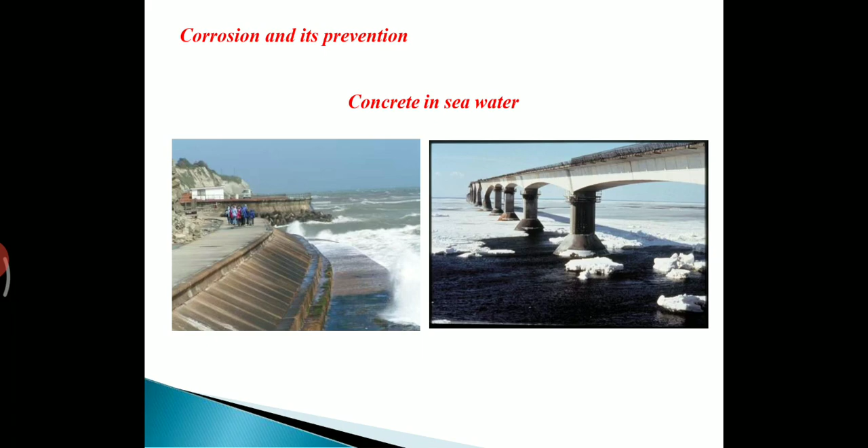So first let us see what is corrosion of steel. ASTM defines corrosion as the chemical or electrochemical reaction between a material, usually a metal, and its environment that produces deterioration of the material and its properties. For steel embedded in concrete, corrosion results in the formation of rust, which has 2 to 4 times the volume of the original steel and none of the good mechanical properties. Corrosion also produces pits or holes in the surfaces of reinforcing steel, reducing strength capacity as a result of the reduced cross-sectional area of the steel section.

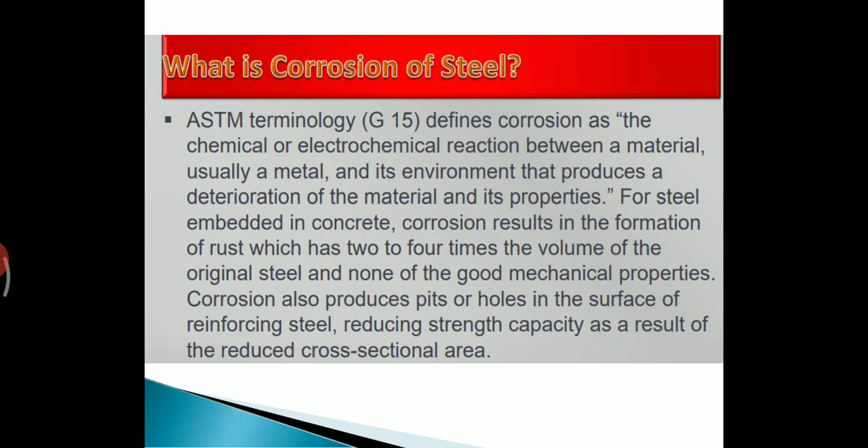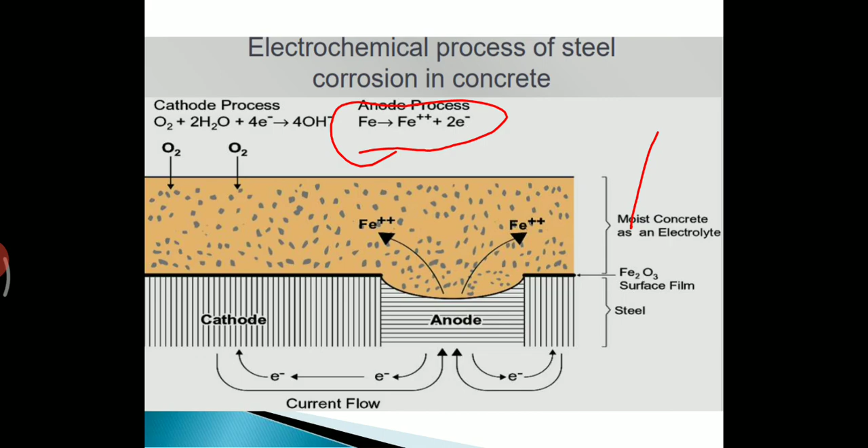The natural state of any metal is in its oxidized state. Metal can be found in nature in the form of oxides, carbonates, sulfates. For the practical use of a metal, a certain energy is invested in its reduction from the natural mineral state. The process by which a metal returns to its mineral state is generally termed corrosion. Corrosion is therefore the process by which the metal passes from its metallic state at zero valence to its oxidized state, liberating electrons.

For iron, this can simply be written as the equation: Fe becomes ionized in terms of Fe plus plus plus 2E minus, which liberates the electrons. The electrons are then transferred to another substance in order to become a neutral substance. The mechanisms for transfer of electrons from the metal to another substance can basically occur in two manners: one is directly, or another is through an aqueous solution.

The direct transfer occurs only at high temperature, where water cannot exist in liquid form for transferring the electrons. But aqueous corrosion is the most common mechanism and develops at normal temperature. In aqueous corrosion, the transfer of electrons happens through the liquid medium. In concrete, this method of aqueous corrosion generally happens.

Corrosion in the presence of liquid water occurs by an electrochemical mechanism, so chemical reactions and the redox process occur simultaneously. Thus metallic zones with different electrical potential, due to the metal being in contact with the electrolyte, drive the force of chemical reactions involving the exchange of electrons.

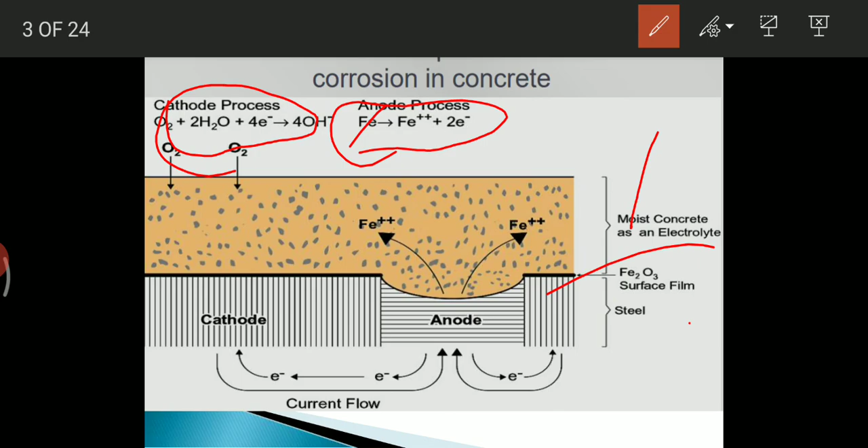So then the next slide, corrosion in seawater. Normally the structure is majorly affected by corrosion which happens due to seawater. Normally seawater is subjected to chloride, yes, it contains a lot of chlorides. Then what happens? The chloride enters into concrete, which forms the corrosion of steel.

Then salt weathering - salt weathering is also done in the concrete from the seashore. Then abrasion by sand - the sand is giving the frictional force when it is hitting the structure, and therefore abrasion by sand happens.

Then seawater contains some amount of CO2. So when CO2 enters into the concrete, then carbonation takes place, and that leads to the corrosion of steel. Then calcium hydroxide and calcium sulfate are soluble in seawater. Then the rate of chemical attack is increased with temperature.

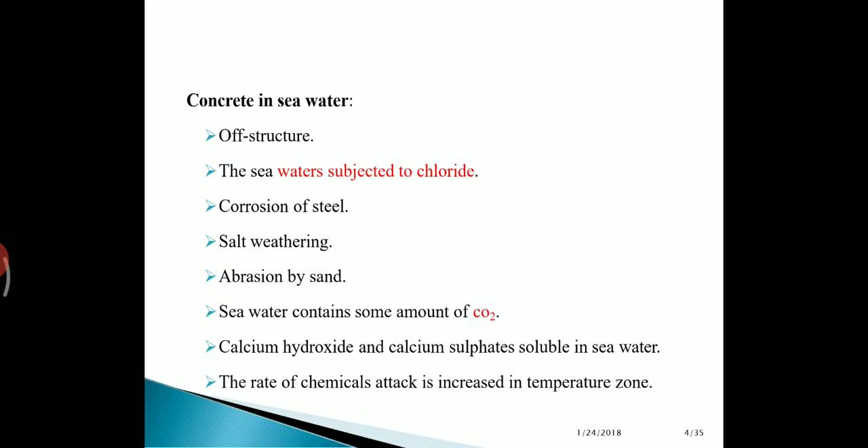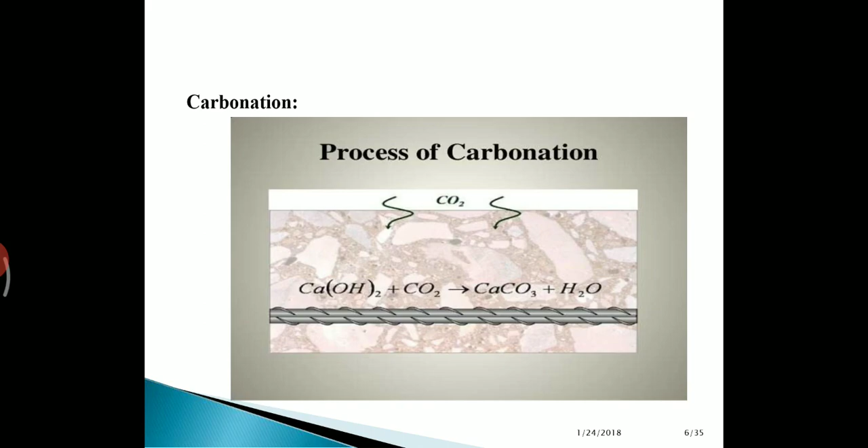Then next let us see the carbonation. So what is carbonation? This is a figure which shows what is affected by carbonation. So the process of carbonation is taken like this. Carbonation of concrete is a process by which carbon dioxide from the air penetrates into concrete and reacts with the calcium hydroxide to form calcium carbonate.

So carbonic acid attacks the concrete. The carbonation of concrete is one of the main reasons for corrosion of reinforcement.

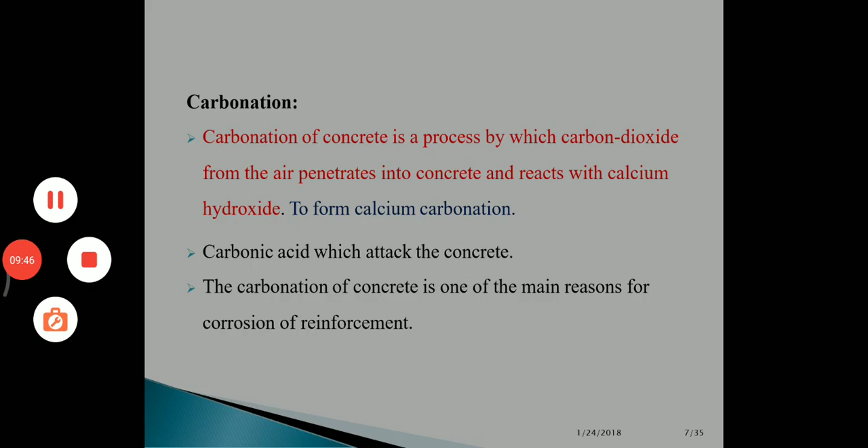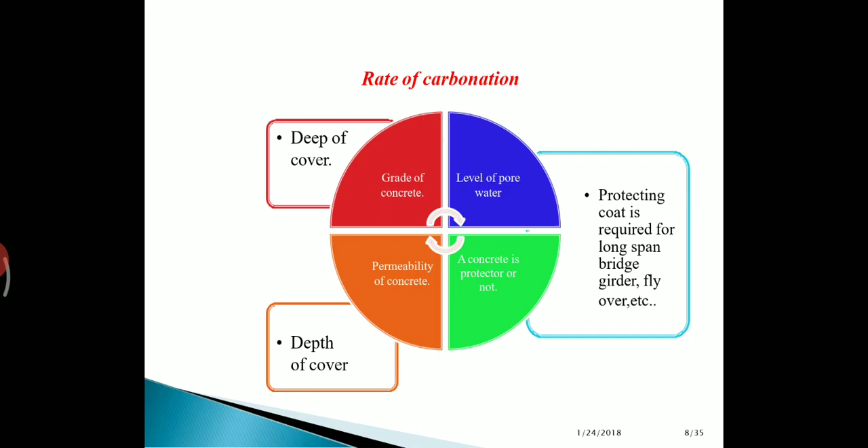Then what are the factors to increase the rate of carbonation? The first one is grade of concrete, then level of pore water, then permeability of concrete, then whether the concrete is protected or not. So these are all the factors which increase the rate of carbonation.

Then what are the effects of corrosion? The ultimate strength of the concrete is reduced, so the strength of the structure is also reduced. Then the structure will fail. Then eccentricity happens - suppose if the joint portion fails due to corrosion, eccentricity happens.

Then cracks and spalling of concrete also happen. The cross section of reinforcement progressively reduces, and therefore the tensile strength carrying capacity of the steel and concrete gets reduced. Then the cover of the concrete is adversely affected.

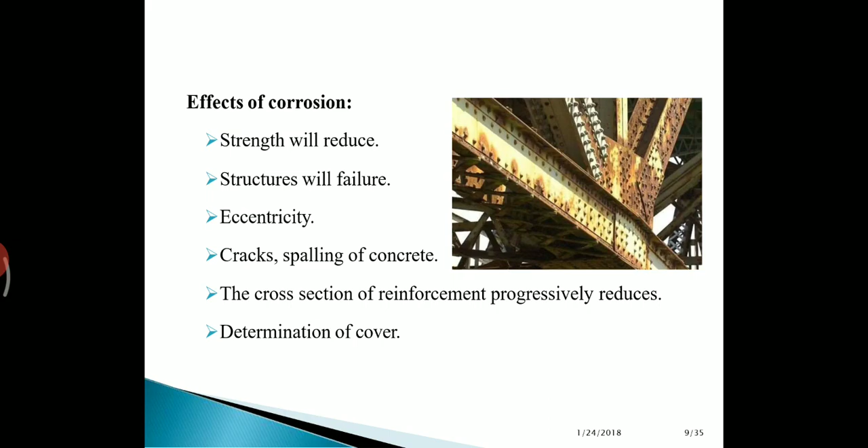Then how do we control this corrosion of steel reinforcement? Let us see. The control of corrosion of steel reinforcement is done by the metallurgical method, then we use corrosion inhibitors, coating to reinforcement, de-rusting or phosphating coating to concrete, cement coating, sealing, fusion bond, epoxy coating, galvanized reinforcement, and finally cathodic protection.

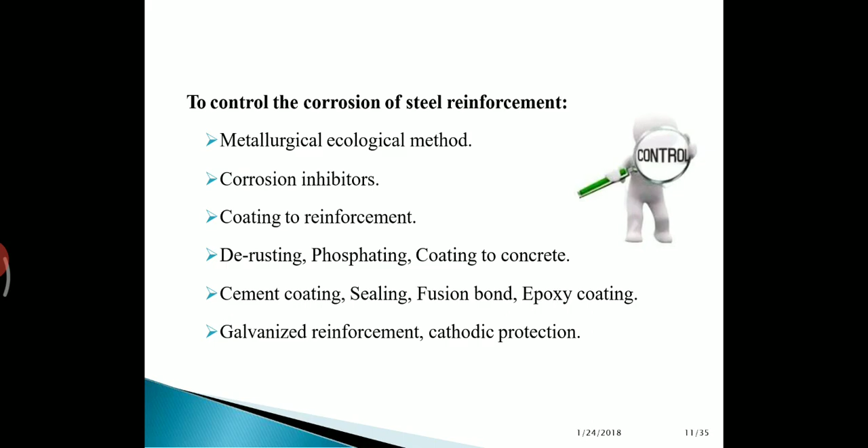So what is the metallurgical method? Steel can be made more corrosion resistant by altering its structure through metallurgical process. So basically, once the manufacture of steel itself is made having resistance against corrosion, that is the metallurgical method.

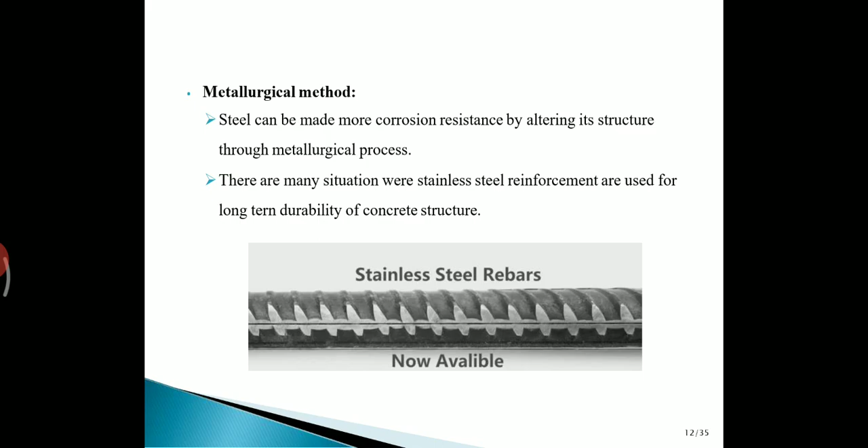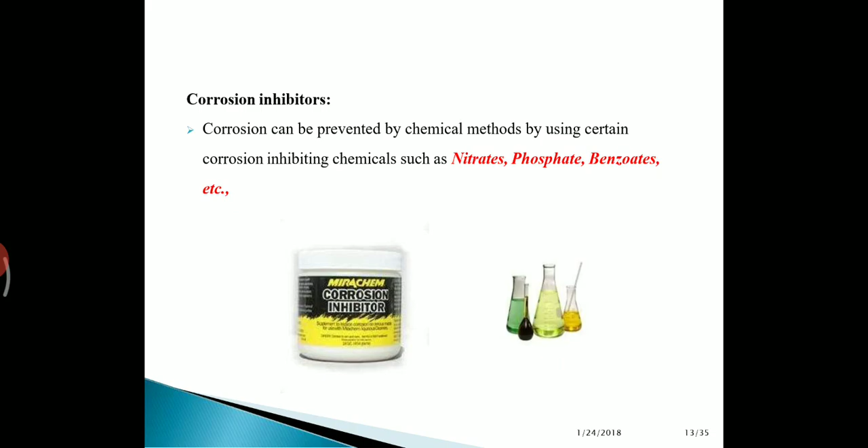So there are many situations where stainless steel reinforcement is used for long-term durability of concrete structures. Then corrosion inhibitors - corrosion can be prevented by chemical methods using certain corrosion inhibiting chemicals such as nitrates, phosphates, then benzoates.

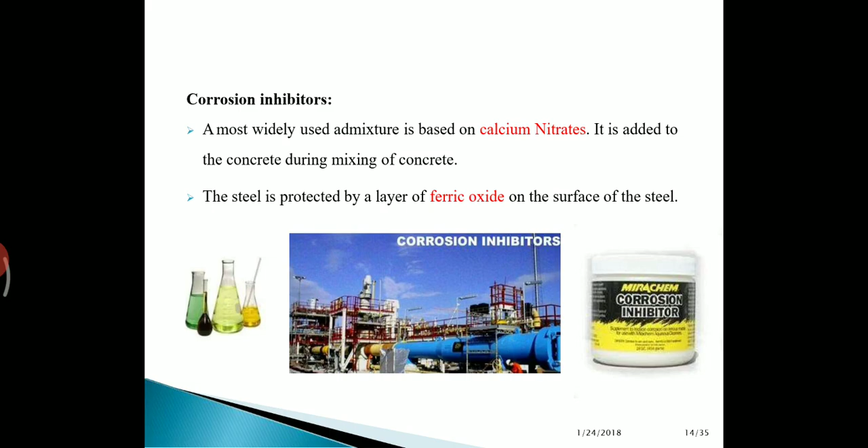A most widely used admixture is based on calcium nitrates. It is added to the concrete during mixing, and therefore the steel is protected by a layer of ferric oxide on the surface of the steel.

Then coating of reinforcement - the object of coating steel bars is to provide a durable barrier to aggressive materials such as chlorides. So the coating should be robust to withstand fabrication of reinforcement cage and pouring of concrete, and compaction by vibration needle.

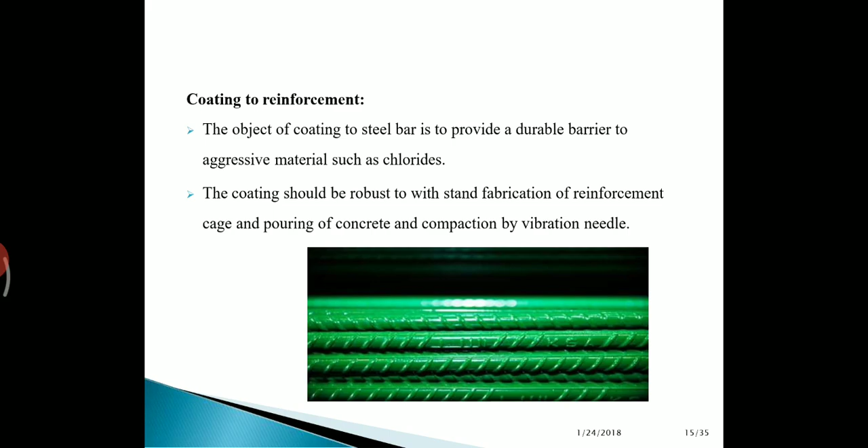De-rusting: the reinforcement is cleaned with a de-rusting solution. Once rods get corroded when placed in exposed conditions, before placing the reinforcement, if it has any formation of rust, it should be cleaned with a de-rusting solution. This is followed without delay by cleaning the rods with wet waste cloths and cleaning powder. The rods are then rinsed in running water and air dried. Then phosphate is applied to the surface, and an inhibitor solution is brushed over the phosphate surface.

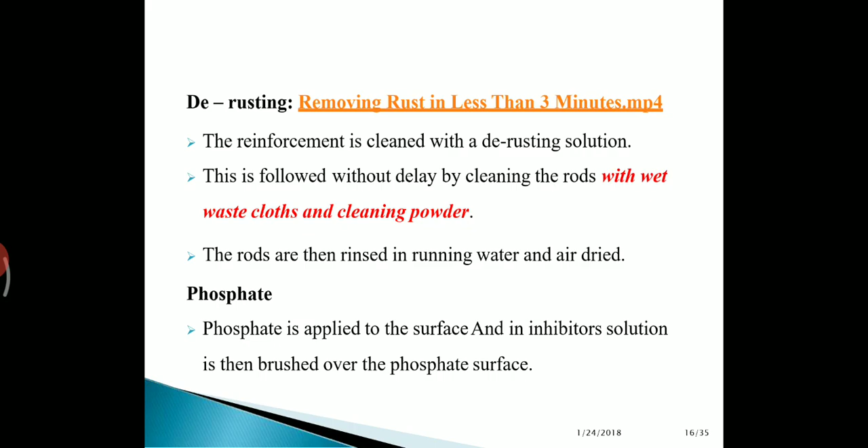Now let us give the cement coating. Slurry is made by mixing the inhibitor solution with water and cement and applied on the bar. The sealing solution is brushed after the rods are air cured, and this sealing solution has an inside curing effect. The second coat of slurry is then applied on the bars and air dried. This is another method to reduce corrosion.

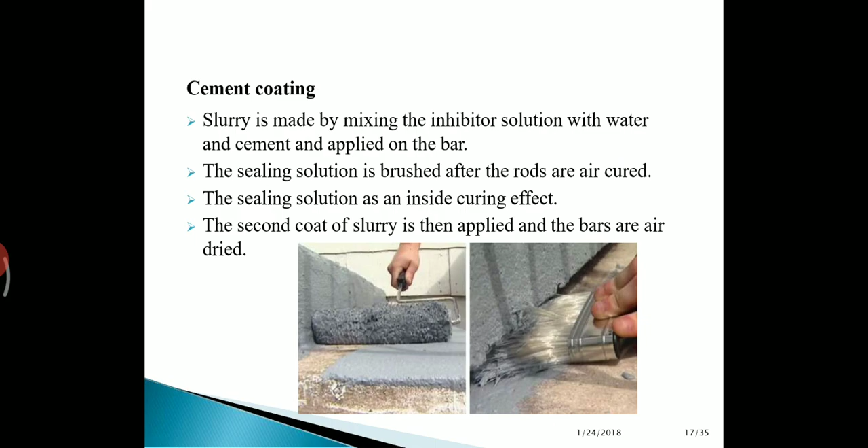Then sealing solution: two coats of sealing solution are applied to the rebars in order to seal the micro pores of the cement coat and to make it impermeable to corrosive salt.

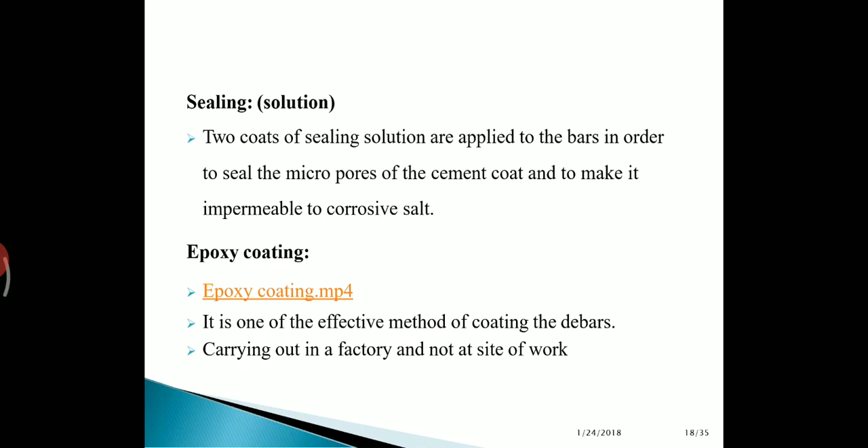Then we are also using epoxy coating. It is one of the effective methods of coating on the rebars, carried out in a factory and not at site work. In the epoxy coating process, plants are designed to coat straight bars in a continuous process. The epoxy powder particles are deposited evenly on the surface of the bars. The epoxy coated bars have excellent protection against corrosion in aggressive environments.

After treatment, cutting and bending may injure the steel, and the coating may get damaged during vibration of the concrete.

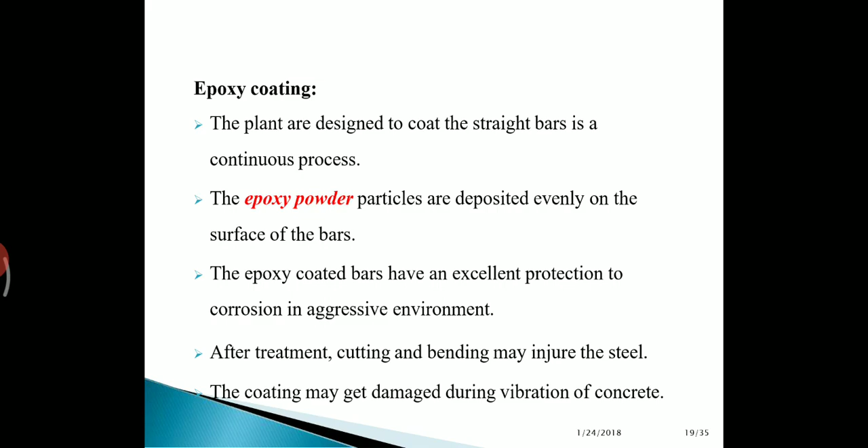Then galvanized reinforcement: the galvanized reinforcement consists of dipping the steel bar in molten zinc, so the coating of zinc bonds to the surface of the steel. The zinc surface reacts with the calcium hydroxide in the concrete to form a passive layer and prevent corrosion.

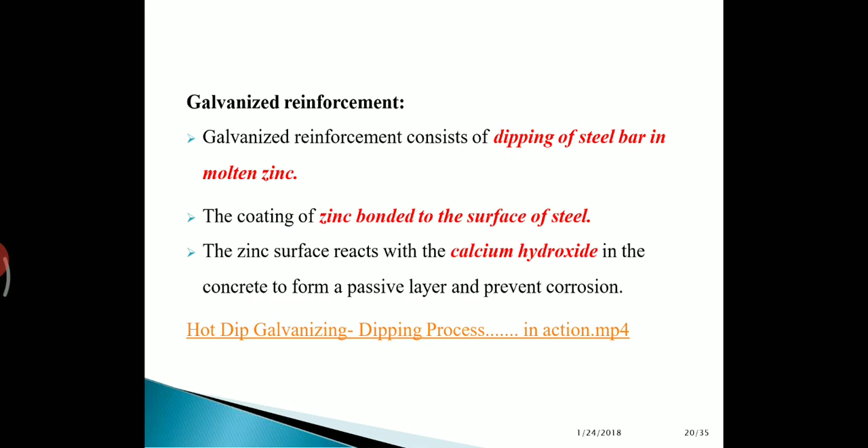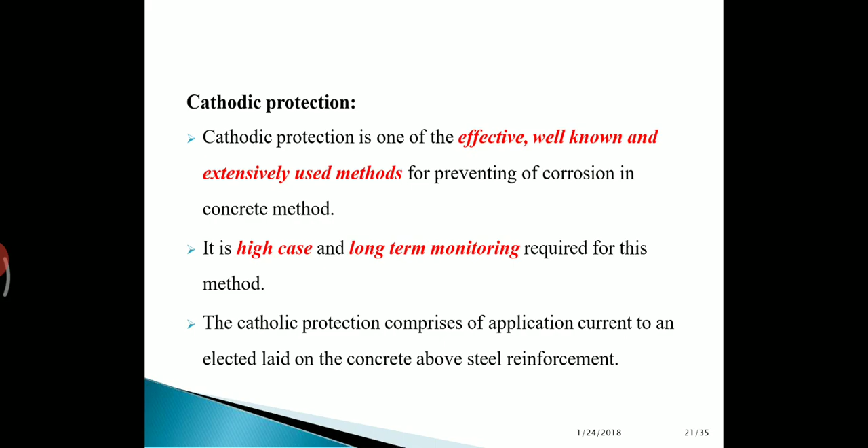Next, a very important method: cathodic protection. It is one of the effective, well-known and extensively used methods for preventing corrosion in concrete. It requires high cost and long-term monitoring. Cathodic protection comprises application of current to an electrode laid on the concrete above the steel reinforcement. Let us discuss cathodic protection further.

Let's see the mechanism behind cathodic protection. It is used to prevent or reduce corrosion rates. Corrosion is an electrochemical process resulting from the formation of cathodes and anodes at different positions on the metal surface. Cathodic protection works by connecting the reinforcement to another material that is anodic in relation to it. The reinforcement becomes a cathode and its corrosion is substantially reduced.

There are two systems: one is the sacrificial anode, and the other is impressed current. In the sacrificial anode system, the material of the anode is more reactive than the metal in the structure, for example zinc or magnesium, and the anode is consumed in preference to the reinforcement. In the impressed current system, the anode material itself may be inert but is maintained in an anodic state relative to the structure by being connected to the correct pole of a direct current power supply. An outline of the process is shown in the figure.

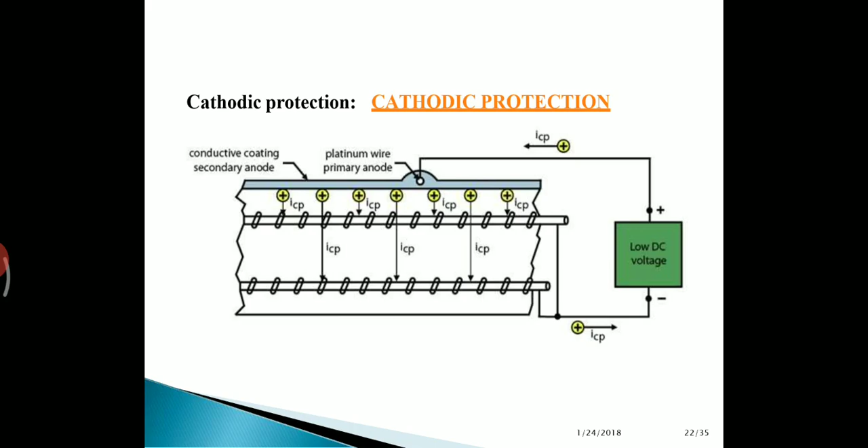You can see in this figure the anode is distributed over the surface, either as an inert metal mesh or conductive coating, or many discrete anodes fixed in drilled holes in the concrete. It is usual to carry out a commissioning survey once the system has been activated to check the reinforcement is achieving the required degree of polarization. Often a permanent monitoring system is installed to check the system continues to operate successfully. This is the impressed cathodic system.

Then, coating to concrete. If we give coating to the concrete, this is another method against corrosion, for corrosion protection. If we give coating to the concrete for the purpose of protecting it against environmental pollution, industrial fumes and contamination of ground, there is a reduction in the depth of carbonation of the protected concrete.

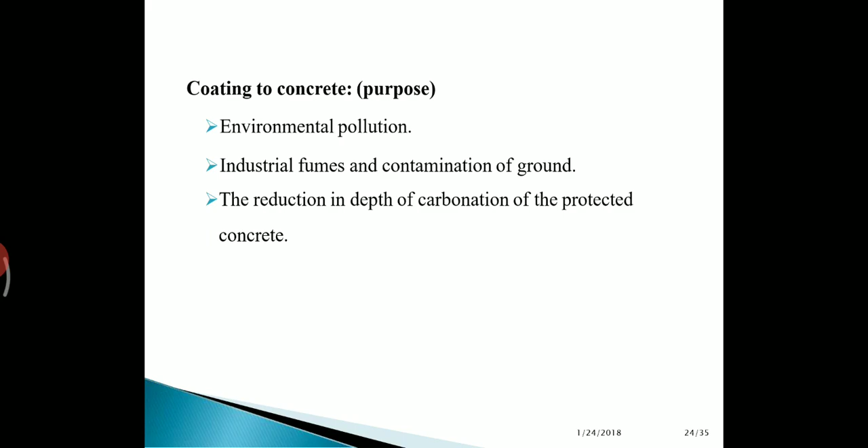So with this, I conclude this video lecture. In this video lecture, we have seen very elaborately about corrosion. Okay, so thank you.